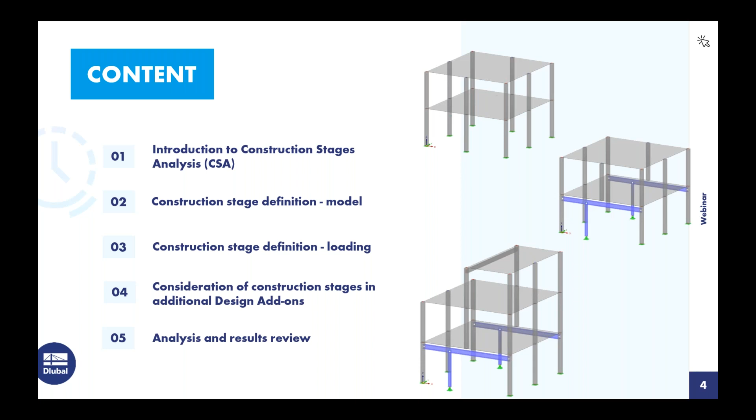So we might be wondering, why would we want to consider stage construction? Well, we know during the construction process that the structure may actually pass through several loading conditions that vary from the completed structure. For example, when we're talking about multi-level story buildings and adding each additional level on top of each other, the previous level is already undergoing deflections and stresses. For example, if we look at the building on the right-hand side, we set up our formwork for the first level, we let the concrete cure, we remove the formwork and we move on to the second level. That first level is already undergoing some of these deflection stresses from self-weight alone, or maybe some of those additional construction loads.

So we'd like to take those into account with stage construction. Regular simple structures may see very little difference when we compare the stage construction to simply applying the loads to the finished structure. However, when we're talking about multi-story buildings or structures with vertical irregularities, such as interrupted columns or walls, we might actually see a significant result difference between the finished structure versus taking into account each continuous stage. The construction stage analysis add-on within RFEM allows us to compare similar structures under different modeling or loading scenarios in a single file, and we also can include nonlinearities with these comparisons. So rather than creating multiple files with the first level completed, then the first level and the second level completed, we can consider all of that in a single model.

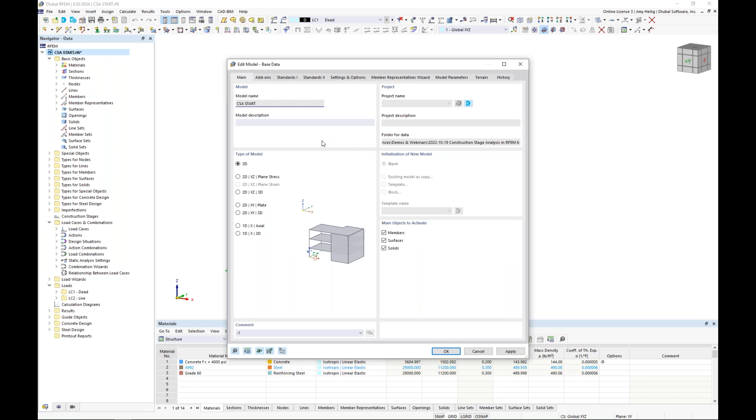Under this second tab, this is where we have all of these optional add-ons. This would allow you to essentially purchase these add-ons specific to your materials and design for your particular projects. For today, we're going to be working with the construction stages analysis add-on. You can see that's turned on here, as well as the concrete and steel design add-ons located over here on the right.

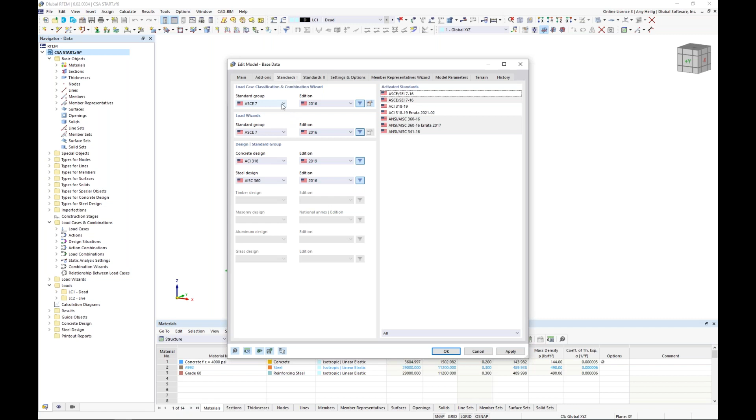Now under the third tab, this is where we set our standards. We want to generate the load combinations according to ASCE 7, available within this dropdown. We'll see here the NBC standard, as well as Eurocode and many other international standards. As far as the concrete design, we will be using ACI 318, and steel design will be AISC 360. Using this dropdown, we can see the CSA standards available, as well as other international standards.

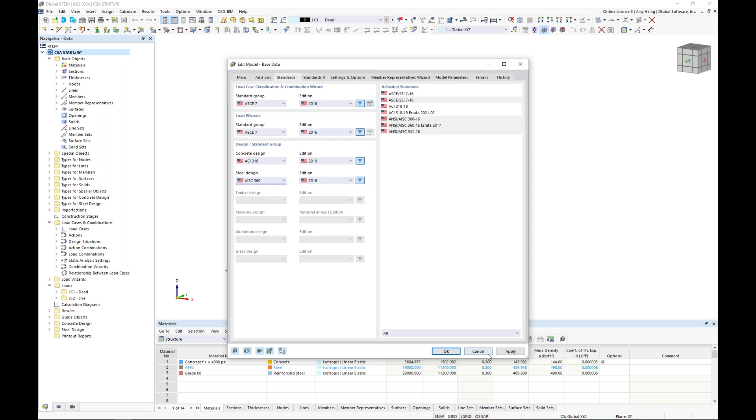So once we have verified this information under the base data, we'll go back here to review some of the elements that have already been modeled. If we take a look again at the navigator, we'll see that all of our elements were utilizing 4,000 PSI concrete.

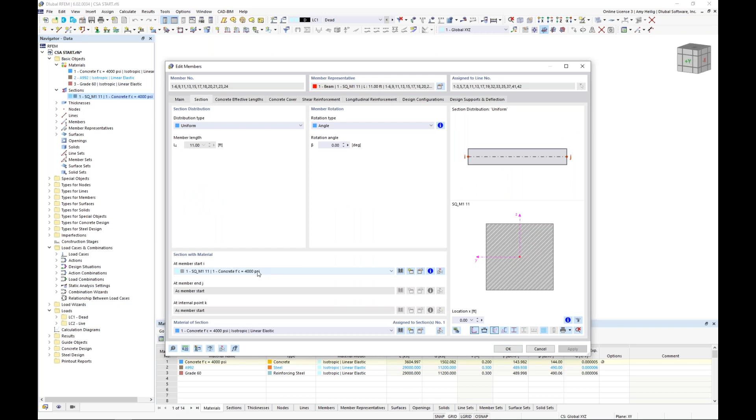Looking at our cross section, so all of my columns here, if I double click on one of them, are going to be utilizing this 11-inch by 11-inch square section. Under the second tab, we can see that the concrete material here is set to 4,000 PSI.

Now back under the main tab, notice that the design properties is checked on here. This simply means that we not only want to use this member for the analysis within the main program RFEM, but we're also going to do the design utilizing that concrete design add-on that we had turned on within our base data. So this gives us all of the available tabs up here to define our reinforcement that will be used later on within the strength and serviceability design.

Now, I'm not going to go into too much detail today. There is an additional webinar devoted entirely to concrete design according to the ACI that's available on our website and YouTube channel. So just to quickly cover this, we'll see here that we can specify the concrete cover.

For the shear reinforcement, I have defined number 3s here at 12 inches on center. And then I also have my longitudinal reinforcement, which is going to be 12 number 6s spaced evenly around our cross section.

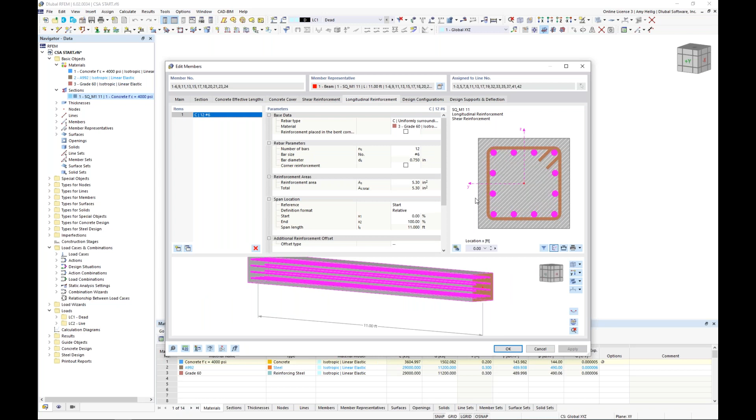So this is a very similar workflow here for my surfaces as well. Each of these surfaces was defined with a thickness of 12 inches. If I double click on one of these surfaces, again we can see that thickness defined here, 12 inches, with the 4,000 PSI concrete.

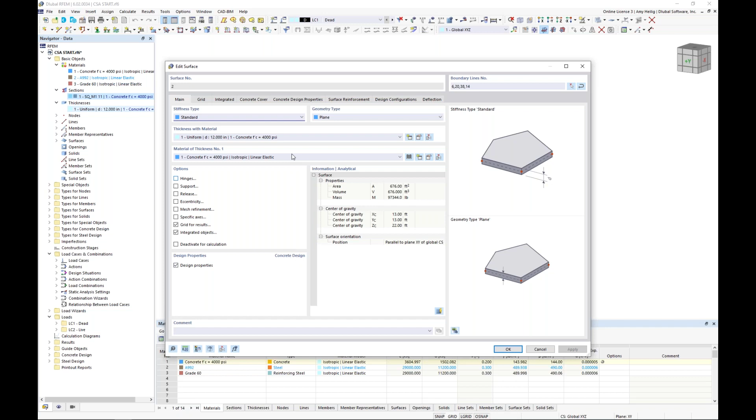Again, I've activated this design property, so we're not only using it for the analysis, but we also want to define our reinforcement for this slab to do the design later on within the concrete design add-on. We see here the concrete cover is defined, as well as the surface reinforcement.

So looking at this surface reinforcement, we can go into the details here. I have specified simply number 6s at 6 inches on center in both directions for both the top and the bottom. So very simple application for this concrete slab.

But I also have all of these additional free rectangular reinforcements defined. This allows me to place some additional reinforcement. You can see number 6s again at 6 inches, where these concrete columns are framing into this slab. So rather than applying to the entire surface, we apply to what we call this free rectangular location.

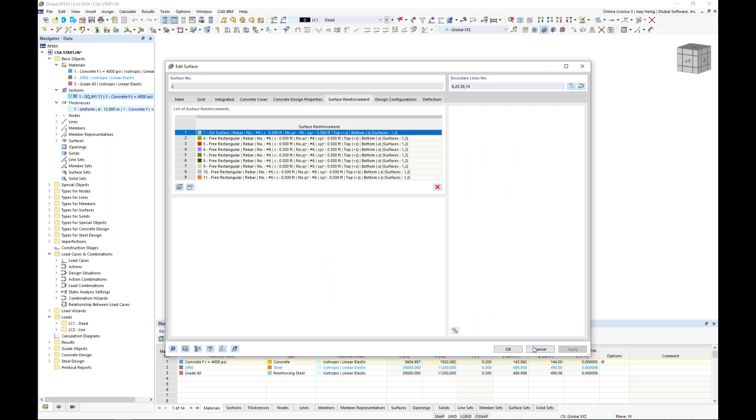So once we have defined all of our reinforcement here, what is actually turned on by default, if we go to our Views tab within our navigator, up here under the Types for Concrete Design, and maybe I turn this into wireframe view, we can actually see the reinforcement here displayed graphically.

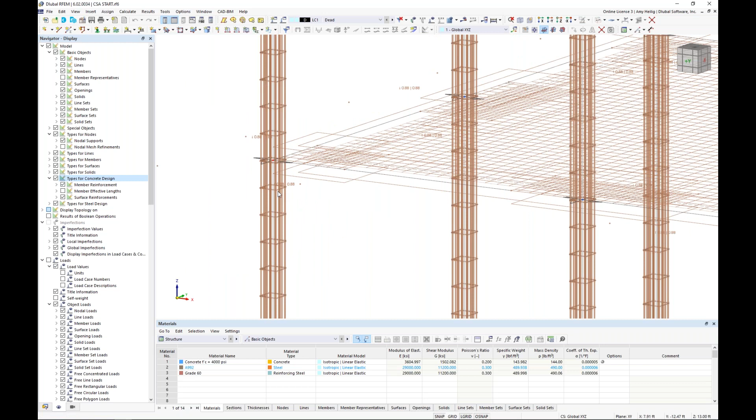So we see our shear and longitudinal reinforcement for our concrete columns. And then, as I mentioned, those slab elements, we have our number 6s at 6 inches on center, but we also have some additional reinforcement here where those columns are framing into the slab. So we can always turn off this display just to get a little bit of a cleaner look here.

Now, additionally, what else I have hidden, which I will turn on now, is the mesh refinements. So I've added these FE mesh refinements, you can see by these symbols here at the tops of each of the columns. So we know that within the program, we're likely going to get what we call singularities, where these single line elements, which are essentially our members here, frame into these slab elements at the single FE mesh point.

So I'd like to refine the FE mesh here, which you can see I have went ahead and done with a nodal mesh refinement.

Additionally, what I have defined, which we'll find under the result objects, is what we call surface result adjustments. Now we can see all of those displayed at the tops of our columns. If I double click on one of these, we have the ability to actually average out the internal forces over a set area. Again, this just helps smooth out those singularity areas.

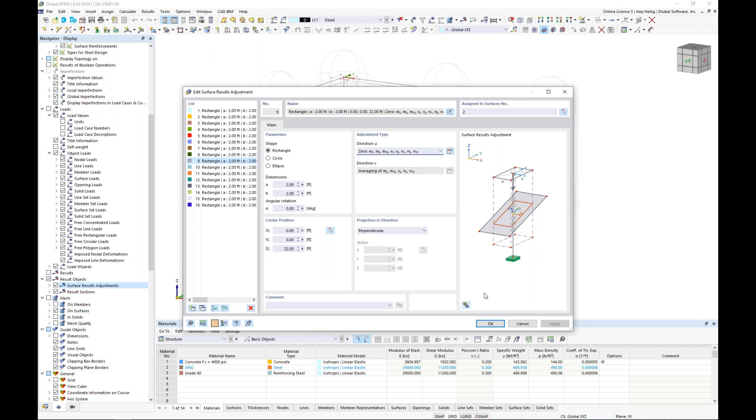For my simple example today, I actually just zeroed out those internal forces at those locations. They're not really a concern for our simple example, so I went ahead and set that as the definition type here for these surface result adjustments. Again, all of this is just to help with those singularity issues.

So we'll go ahead and turn those off. These will come into play a little bit later on, but for now we will turn this back into the rendered view. So this is my starting structure, just a simple two-level concrete structure.

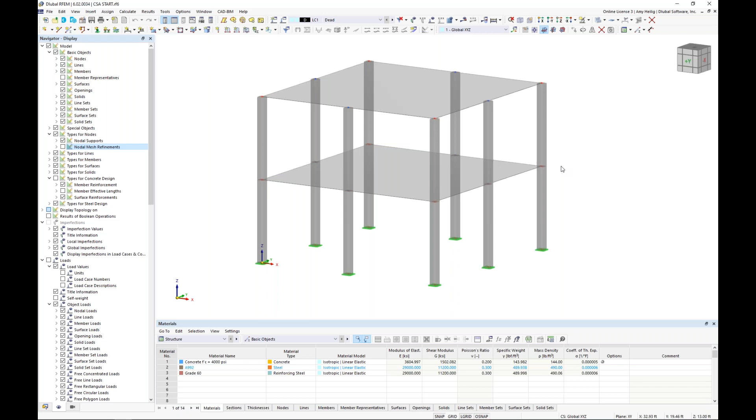Ultimately what I'd like to do is remove these center two columns on the first floor. Instead of these center two columns of the existing structure, I'm going to add in some steel beams that span between these exterior columns underneath the slab, as well as an additional couple of steel columns that are slightly offset from the center of the structure. So we're going to deactivate these columns and instead add in some steel members, which will describe the workflow here of our staged analysis.

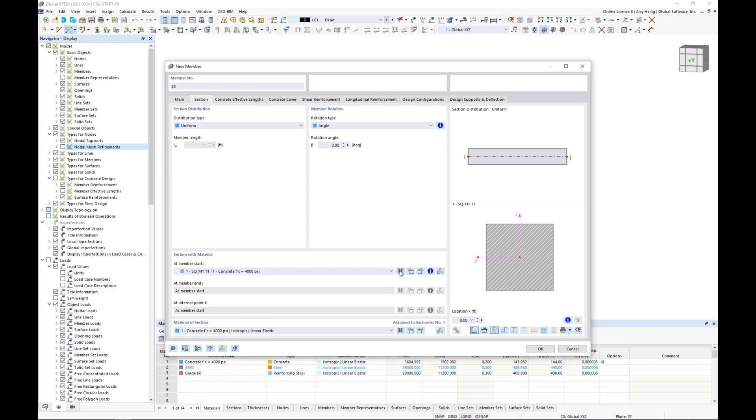Before we define any of these construction stages, we need to ensure that we have everything completely modeled in RFEM. So we will begin by drawing a new member here, and up in my quick toolbar I can draw a new single member. Now under the section tab, I want to define a new cross-section by visiting my cross-section library.

We can see all of the various sections available to us, including the parametric sections, where we simply input the dimensions and the cross-section properties are calculated automatically. Now, alternatively, we can view these standardized sections.

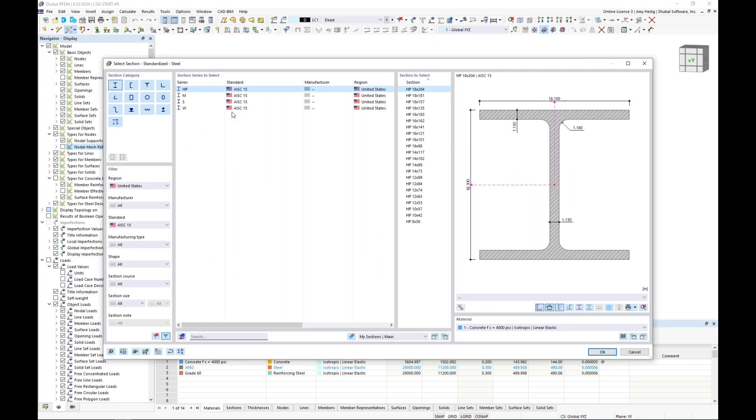For example, we can activate our I-beams. We can use our filters on the left to filter to the United States and to the AISC 15, and I want my beam section to be a W14 by 82. So I scroll down here to my list and select the 14 by 82.

Of course, we don't want this to be a concrete material, so what we'd want to do is activate our material library for this particular section. Once we launch our material library, again we can use our filters on the left to filter to the material type steel, then set the standard to the AISC 360, and we'll see steel A992.

Now for me, I already have this steel material defined within this model. So rather than redefining a new material every time, I can just select it here within my dropdown. I select material number 2, A992, and our beam has now been defined with the correct cross-section as well as the material properties.

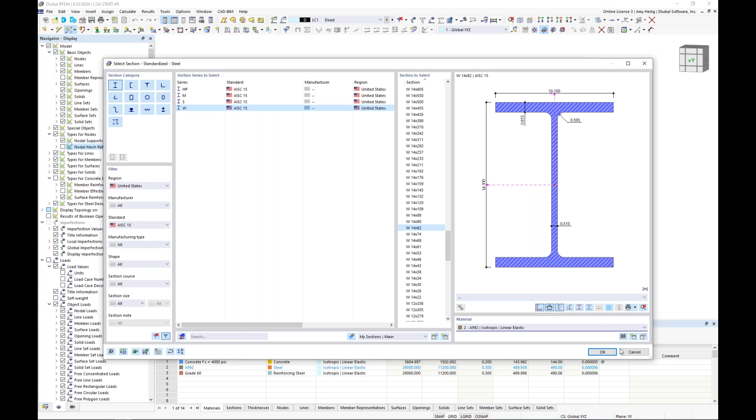In addition to defining the cross-section and material, notice that the design properties is turned on as well, but we're no longer referencing the concrete design add-on we activated under the base data — we're now referencing the steel design add-on. Before I draw these members, I also want to activate a couple other options, including hinges and eccentricities.

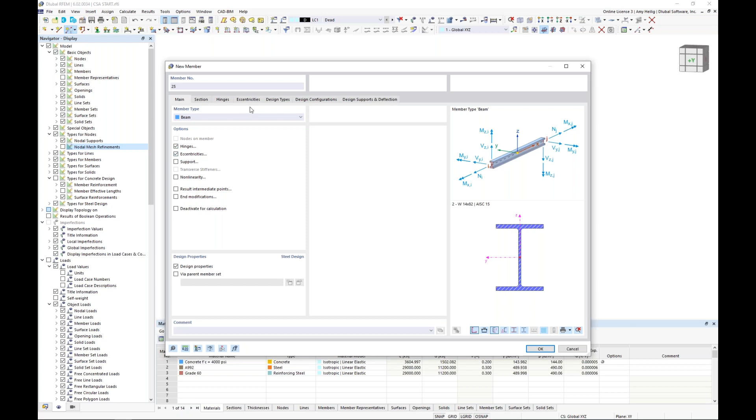Notice we have two additional tabs here at the top. Remember that everything within RFEM is considered fully fixed, so if we want to release a moment, for example at the ends of the member, we need to define a new member hinge. We do so by activating the hinges.

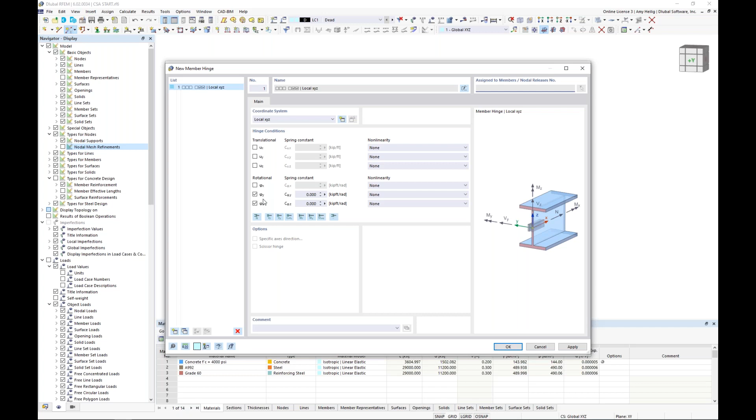We create this new definition type, and the program automatically assumes I'd like to release the moments based on the local Y and local Z axes of the member. So this is a member end moment release. I click OK, and now I've applied that to the member start. Rather than redefining for the member end, I can simply select it from my dropdown. So we'll go ahead and release the moment at either end of this particular section.

Now the eccentricities is a very similar workflow. We want to define a new member eccentricity here, and I'm going to use this option within my dropdown relative to section.

I'll tell the program to take the topmost point of my cross section, and I want to offset it from an additional object that already exists within my model. I'm going to select the option surface, and then I can graphically select surface number 1. I want to drop this beam member down below the bottommost point of this surface.

The advantage of using this option relative to section is that if I make any changes to my cross section size, or any changes to the thickness of my surface, this eccentricity will automatically update. I don't have to come back in here and adjust it manually.

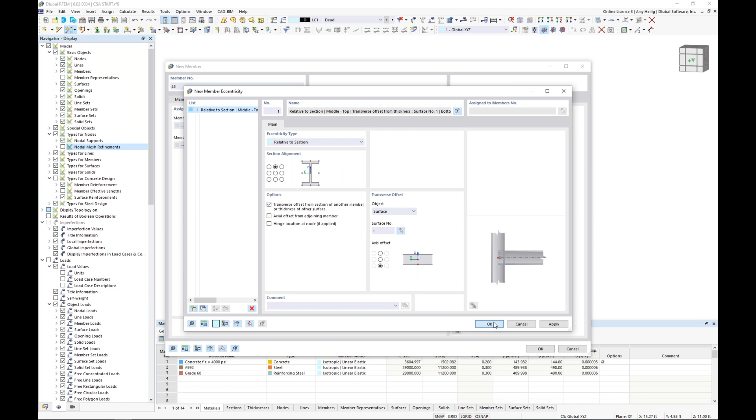So we applied that eccentricity definition to the member start. We also want to apply it to the member end. Now that we have defined the hinges and eccentricities, I click OK, and then I will snap from the right-hand column to the left-hand column at the front of the structure, and also do the same at the back. Now we can see this steel beam drop down below the surface.

Obviously, it's intersecting these concrete columns, but that's completely fine. We'll make these changes later on with the construction stages so that both of these do not exist together.

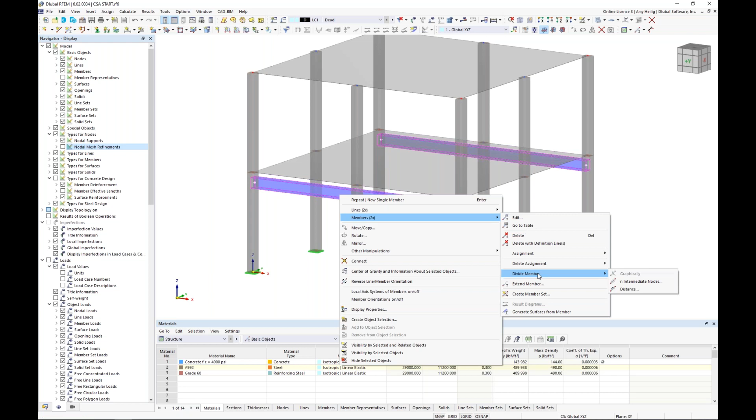I'm going to hold down my control key and select both of these members, right click, and under the member option, divide the member by a set distance. Here I want to add a node along the member 8 feet from the member end. But instead of actually dividing the member, I'll turn on this checkbox to create the node along the length of the member without dividing it.

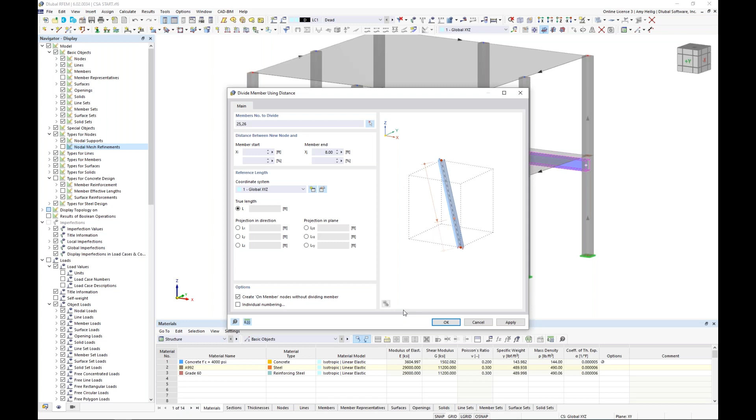When I click OK and we turn this into wireframe view, you'll see that this is still one continuous member, but we now have a couple of nodes defined along the member length. These nodes are special in the sense that they're of the type on member, and the program automatically detects which member it should be integrated with.

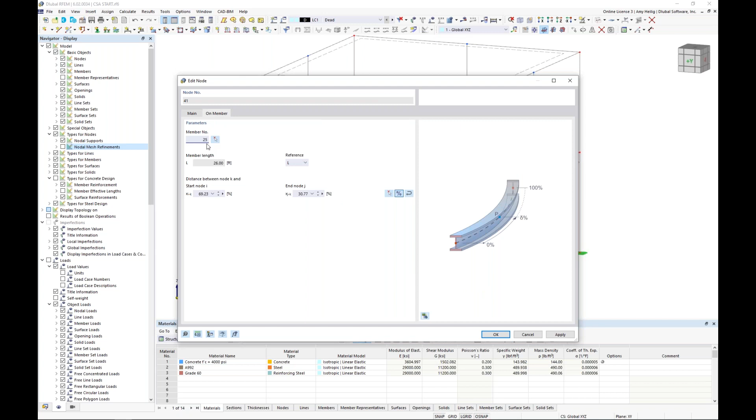So this allows me now to draw in my steel columns that will frame into these steel beams. I'll begin by adjusting my drawing work grid, which we can turn on at the bottom of the page, and we will also adjust the plane.

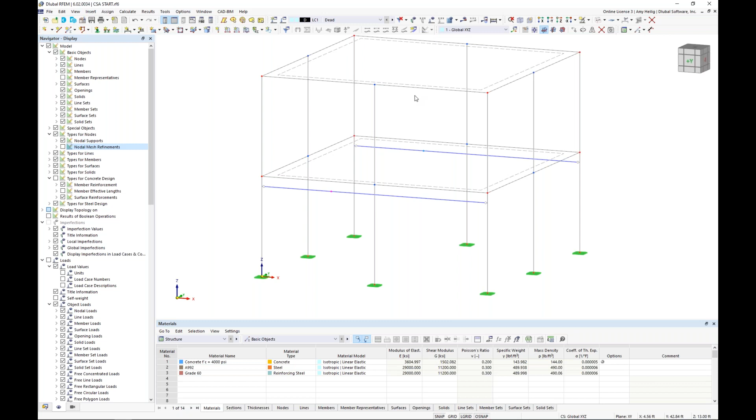I will create a new cross section yet again. The member type is set to beam. The section will be defined once again from my section library. In these standardized sections, I want to select a W8 by 35. Remember, I already have my A992 material defined within the model, so I can select that here.

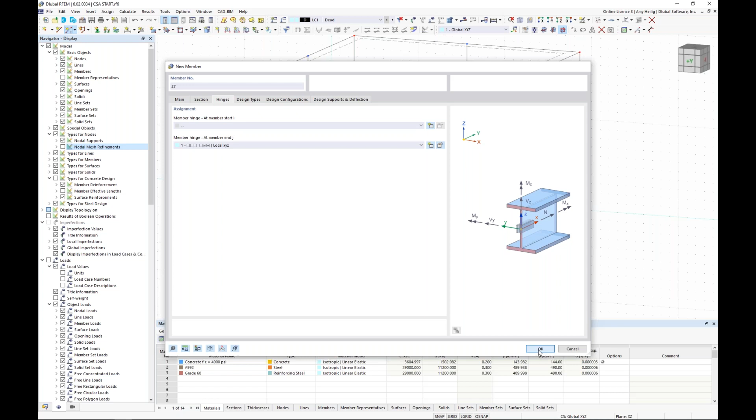I click OK. The one thing we'd like to add here is also a hinge definition. Under my hinges tab, remember I have already defined that moment release, so I can select it from my dropdown, where I can release the moment at the member end. I click OK, and then I'm going to snap from the bottom of the structure up to that node that was created. I can right click to exit this dialog box.

If we take this element, we can highlight it, hold down our control key, and drag and drop it to the rear of the structure to create that additional column.

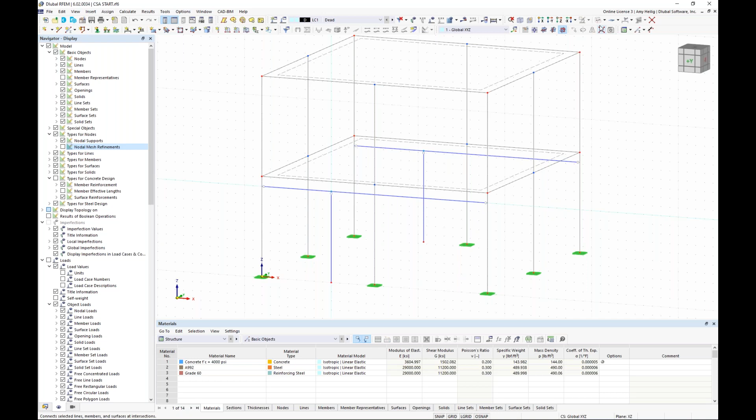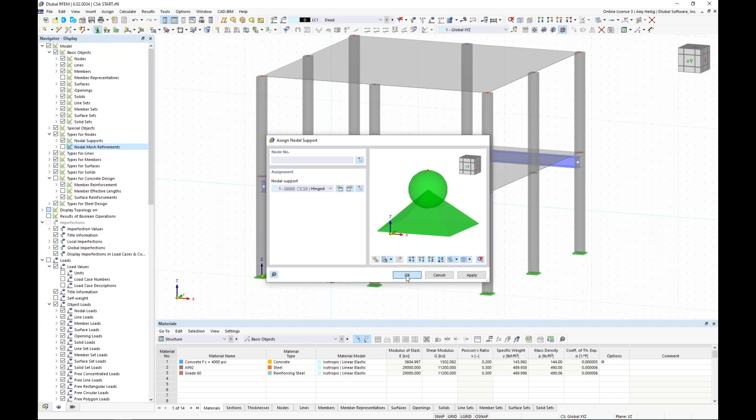Now that these two columns have been generated, there's a few additional things to consider. Number one, we obviously need to add some supports to the bottom. We'll go ahead and add in a new nodal support, using one of the default definition types, hinged. I can click at the bottom of these steel columns to add in that nodal support.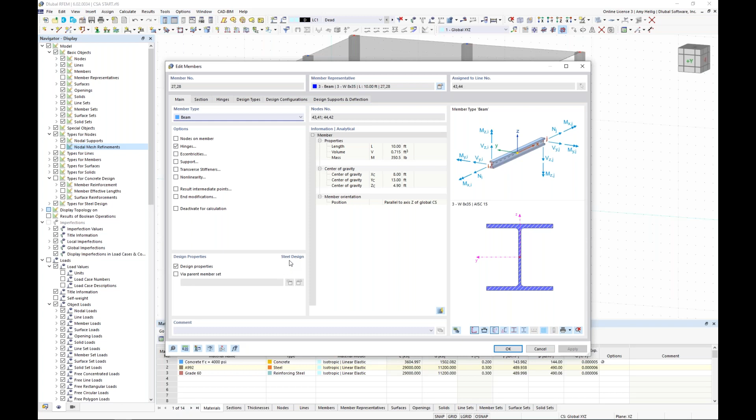The second topic: holding down my control key to select both of these columns. Remember, we are going to design these members utilizing the Steel Design add-on at the end of this example. But one thing required if we want to do so is to define information like the unbraced lengths, which we do under the design types effective lengths. I have an additional webinar devoted entirely to steel design according to the AISC that goes into much more detail on the unbraced lengths or effective lengths definition type.

So we'll quickly add in these intermediate supports applied here for flexural buckling, torsional buckling, and lateral torsional buckling. Under this second tab, the default option is to add in this intermediate support at the member start and member end.

And now my unbraced lengths for my stability design will default to the full member length. So when I click OK, we go back into the model and the unbraced lengths have now been defined here for these particular elements.

Now we need to do the exact same thing here for our beam elements. So we'll select both of these elements, and under the design types, we define a new effective length. But this time, I want the program to detect these intermediate nodes, in particular where this steel column frames up into this steel beam, where I can add an intermediate support in the vertical direction. So now the program will consider this with the effective lengths or unbraced lengths for our stability design.

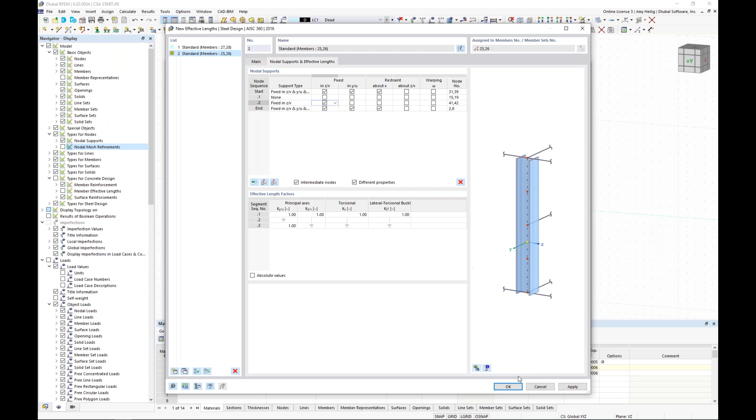Okay, so that takes care of the unbraced lengths, which will again come into play a little bit later on for our actual steel design according to the AISC.

The final topic here related to this first story is that currently this slab element is entirely connected to this steel beam, so full force transmission, full moment transmission between these two elements.

Now, if we would like to release some of those degrees of freedom, what we can do is consider what we call a new line hinge. So under the option here, types for lines, we expand this folder and see a line hinge where we can right click to create a new definition type.

So with this line hinge, I'm actually going to release all degrees of freedom. So we have 3 in translation based on the local X, Y, and Z axes, and 1 in rotation. Keep in mind that these are based on the local axes of the line element itself, not the local axes of the surface or of the member, but of the actual line. Each line has its own X, Y, and Z axes.

But rather than keeping these as fully released, we want to add in a nonlinearity. This nonlinearity will allow the slab to bear down on the beam when we have this downward deflection. So if we have a negative shear value in the local Z direction, we should see full fixity. But if we have uplift, then that relationship between the slab and the beam will be released. So we're applying this nonlinear behavior to the line hinge.

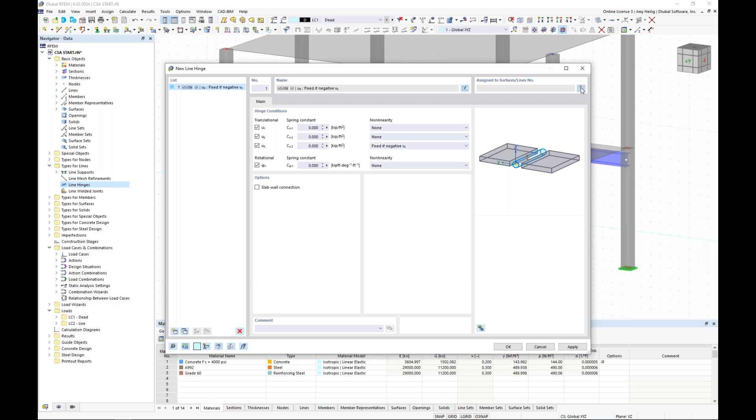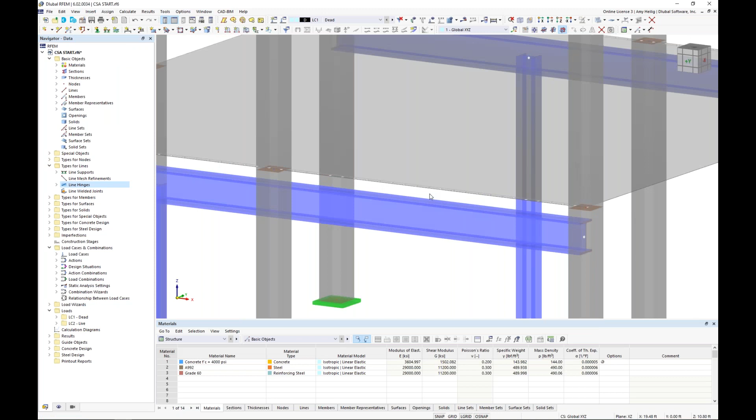So once we have the definition type presented, we want to apply it to the model. We do so by first selecting the surface that we want to apply the line hinge to. Then we select the lines, picking the front line number 12 concurrently with the back line number 18. We click OK, click OK. We can zoom in and we'll see a very small symbol for that line hinge definition.

Again, this will also come into play with our construction stages. So we're now complete with this first story.

The final thing I want to do with this model is to actually add in a third story, a partial third story. Before we do that, if you remember, I'm going to go back to the nodal mesh refinements. I'm going to turn back on my concrete reinforcement and also those surface result adjustments, because when they're graphically displayed, this will ensure that when I copy all of these elements to the third story, all of these details are also copied.

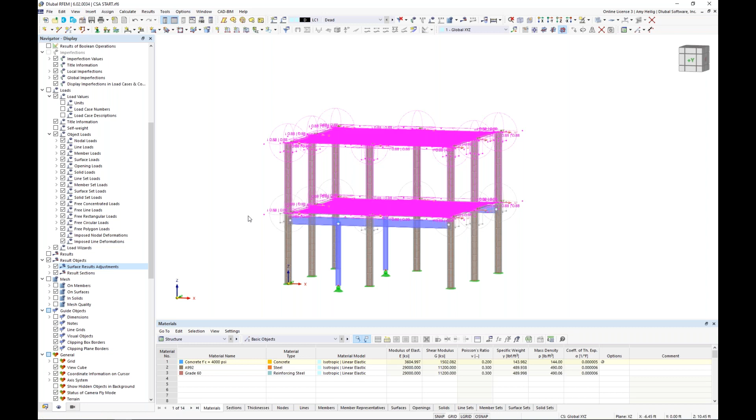So we can go ahead and highlight this top story, including the reinforcements, mesh refinements, and so on. Normally we could use this simple drag and drop copy that I showed you with my steel columns, but I want to take advantage here of the Move Copy tool for a specific reason.

So we're going to create a copy here of that second story, and I can either type in my displacement vector or use this measurement tool. I can snap to the bottom of that second story up to the top, and we see the program automatically detects this is 11 feet in the Z direction. But under the numbering and options, I have the ability to not only copy all of the elements, but also the loading. So I have some existing loading on the structure for dead load and live load, which we'll visit in just a few minutes.

By activating this checkbox, all of those loads will also be copied. So I click OK, and what we should see here is the addition of this third story.

Now for this third story, I actually want it to only be a partial third story. So we'll need to clean this up slightly, and I can do so by holding down my control key to select the top nodes of these columns. I hit delete on my keyboard, and now all of those columns are gone. I'm also going to hold down my control key to select my columns as well as the nodal point at the tops of the columns.

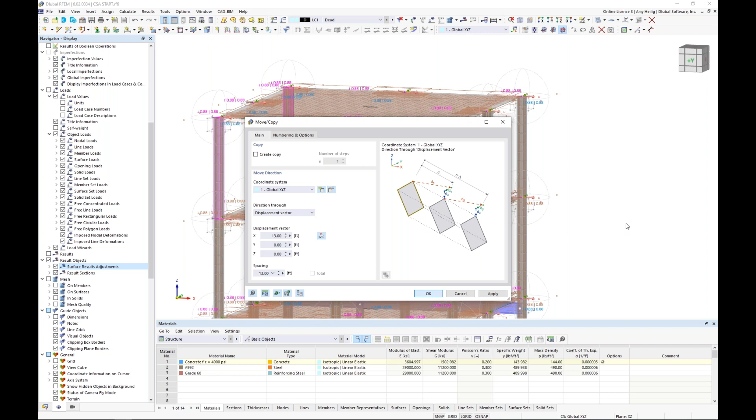I'm going to use my Move Copy tool again, but instead of creating a copy, we'll uncheck this. I want to use my displacement vector. I will select from the left-hand side of the structure because I want to move those columns to the center of the structure, so a displacement vector of 13 feet. When I click OK, we should see that partial third story.

Notice that all of my reinforcement was copied as well, and it's somewhat adjusted as I essentially shrunk down this third story to a partial third story. Back under my navigator, we can see the types for concrete design and all of my surface reinforcement listed. The program was intelligent enough to apply the same reinforcement to that third story. We see our number 6 is at 6 inches on center, and our free rectangular reinforcement defined for that third story.

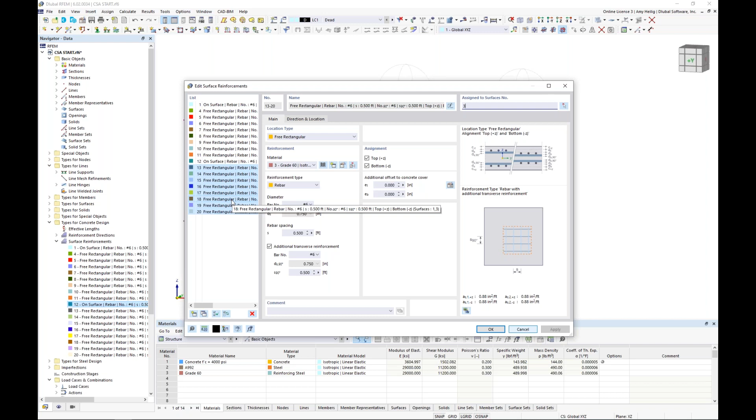We can make modifications here if we don't need such close spacing, or want to change our bar diameter, we can do so. But for this example, I'll leave everything as we see here. So all of this information that exists, we can simply highlight it and hit delete on our keyboard.

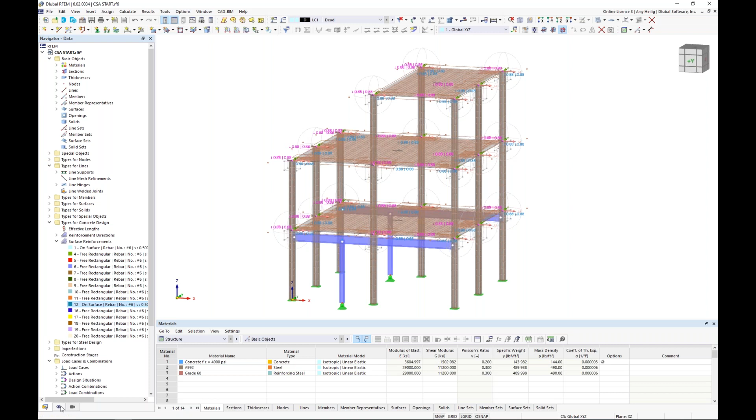So essentially the modeling is now complete for this structure. Again, before we define those construction stages, we need to ensure that everything is fully modeled within RFEM itself. I want to turn off the nodal mesh refinements, my reinforcement, and those surface result adjustments just for a cleaner look. Now we're finally ready to begin with our construction stage definition.

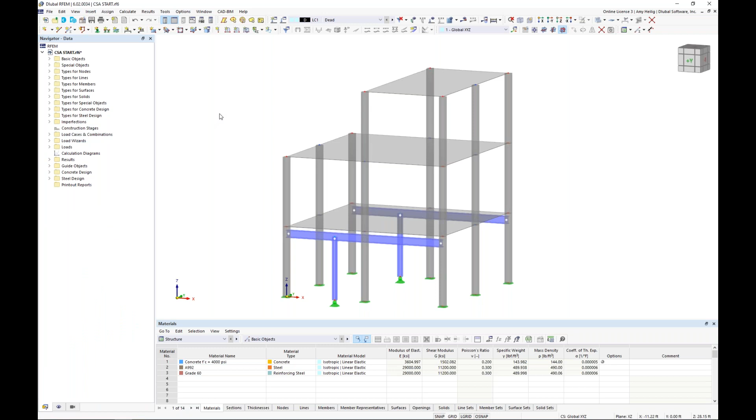Back in my navigator, we have a nice feature here: if I right click, I can collapse all of these folders. Actually, there's one more thing I forgot before we define our construction stages - maybe we wanted to apply a quick rib element that spans between these columns. Just to introduce you to this rib type, we can draw in a new single member.

We can see here the member type would be set to rib. What's special about a rib is we can integrate it with the slab, so those internal forces will now include the internal forces from the slab for some effective width that we define. We also can turn on the design properties to design this as a T-beam, including the reinforcement in the concrete design add-on. For today, I'm not interested in designing it, so I can simply turn this off. I only want to consider it for the analysis. Notice all my tabs to define my reinforcement are now gone.

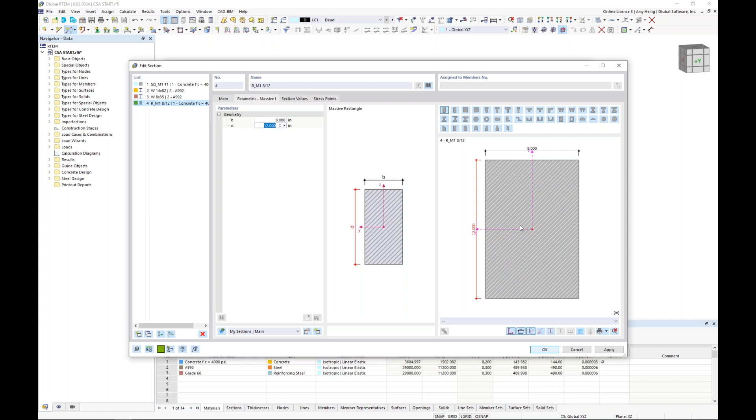Under the section, we will create a new cross-section type for the last time, and we'll choose this massive rectangular section, where under the second tab I can quickly choose my dimensions - I'll type in 8 by 12 inches for this rib element. 4,000 PSI concrete is already defined, and under this second tab, we want to drop this down below the negative Z direction of the surface element itself. When we click OK, we can draw in this rib element from right to left. Again, internally we are including the effective width of this element. If we revisit the rib section, we can see that drawn graphically.

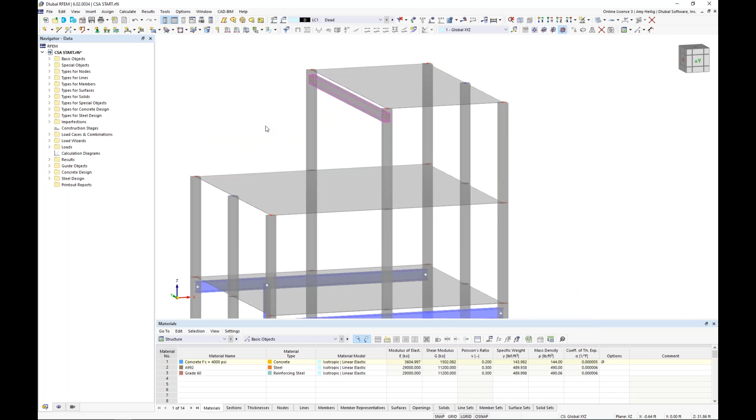Okay, so now we are done with all of the modeling within the RFEM program. We can move on to the construction stages. We've collapsed all of these folders just to make this a little more visible. You'll see here the construction stages option - this is only available because we activated that construction stages analysis add-on under our base data.

So we will start here by right-clicking to create a new construction stage. The program defaults to construction stage number 1 and gives it the name 'start'. We can override that name if we'd like, but we need to tell the program which elements are active for this first stage. We'll begin with our members, our surfaces, as well as our nodal supports, and we get additional tabs up here.

I did want to point out you'll notice this option over here that's grayed out for the time-dependent analysis. This is still in development. Eventually we will link the construction stages analysis to our additional add-on for time-dependent analysis to take into consideration topics like creep and shrinkage, but for now this is still in development.

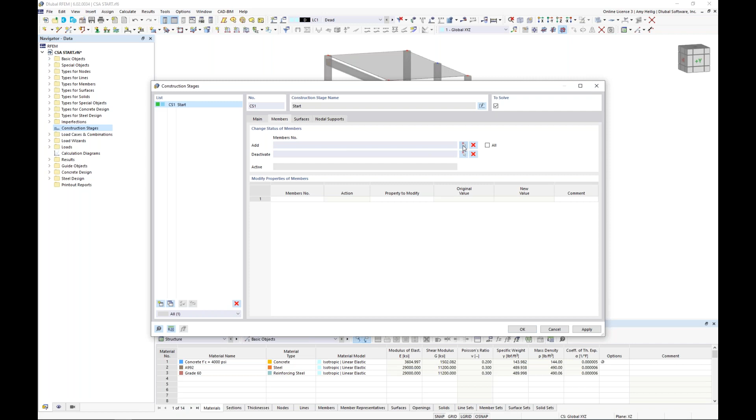So under these additional tabs, what we would like to do is add in the initial elements for that first stage, and we begin with our concrete columns. Down here at this first level, I'm going to select all of my concrete columns, and notice I'm making sure I'm not selecting any of these steel elements yet. For my second floor, I select all of my concrete columns here as well.

I click OK. For my surfaces, I want to activate surface number 1 and surface number 2, and I click OK. Finally, for my nodal supports, I want to activate the nodal supports at the base of these concrete columns. Again, I am not selecting the nodal supports of my steel elements, and I click OK. So my first stage definition is complete.

I'd like to create my second stage definition here, and I can do so within the lower left corner, number 2. Then you can see here that I again have the ability to override the name. So if I'd like to rename this one, we can call this one Add Steel Members.

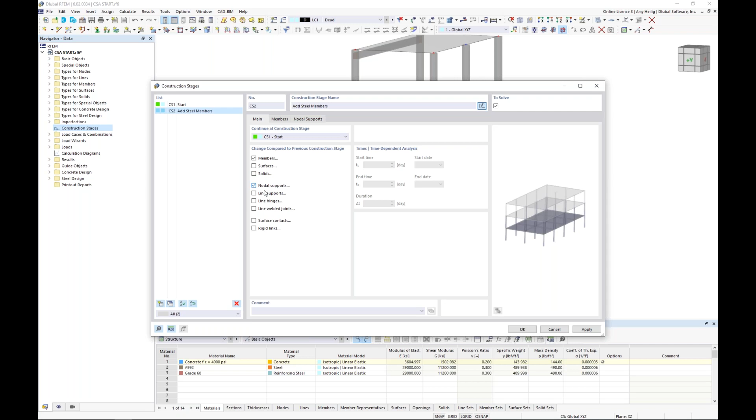I want to activate here my members. I'm actually not making any changes to my surfaces, so we can leave this active, but for simplicity we can also turn it off since we're making no changes. We can go ahead and select the nodal supports. Remember, we also added in those nonlinear line hinges, so we want to activate this here as well.

Now under the members, this is where we want to deactivate those center concrete columns. So I select here graphically members number 9 and 13. Now at the same time, I'm going to activate all of my steel members, so I can graphically select all 4 of these steel members. This entire process is going to be completed here within this second construction stage.

Now, by all means, we could have certainly separated out these options into two stages. Perhaps we'd like to deactivate our concrete columns first in one stage and then an additional stage to add in the steel beams. It all just depends on how your construction stage workflow is for your particular project. But for me, I just define these all in one stage, so that will happen simultaneously.

Now the nodal supports, we do need to add in the pin nodal supports at the base of the steel columns, so we go ahead and select those. I don't need to worry about deactivating the supports at the bottom of the concrete columns, and in fact the program won't even let me because it says these members no longer exist. So those supports are no longer active either.

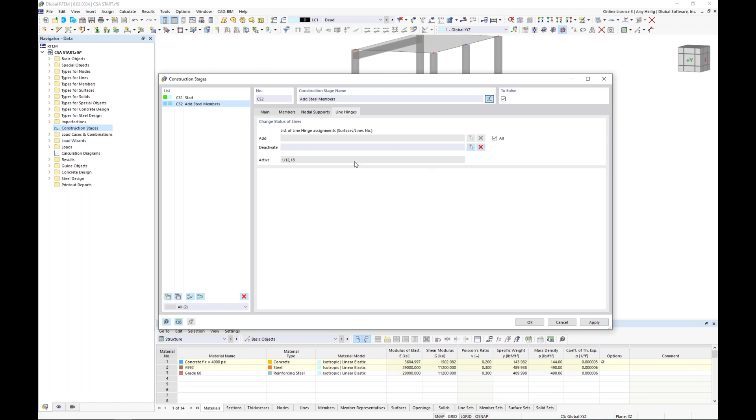Now, finally, we also have the line hinges. So I can graphically select the line hinges, or alternatively I can just simply hit this all checkbox. We only have one line hinge definition in the entire model, so this option all will go ahead and activate all line hinges here. This will complete our second construction stage.

Now the final stage, which we again go down here to the lower left corner, and we want to rename this one to Add Third Story. The options here to activate, we want to leave on the members. We also want to activate the surfaces, but everything else can be unchecked.

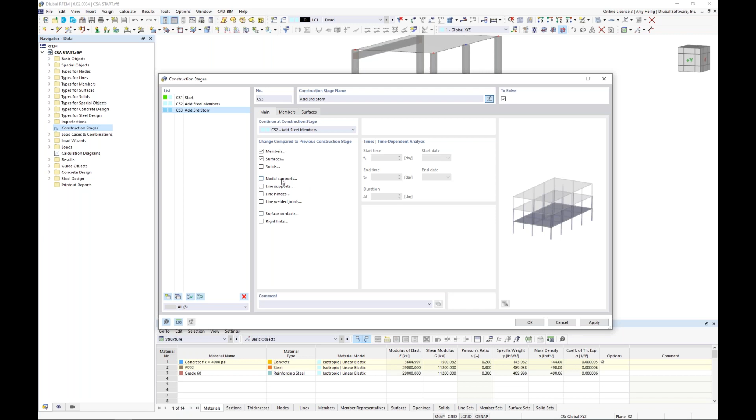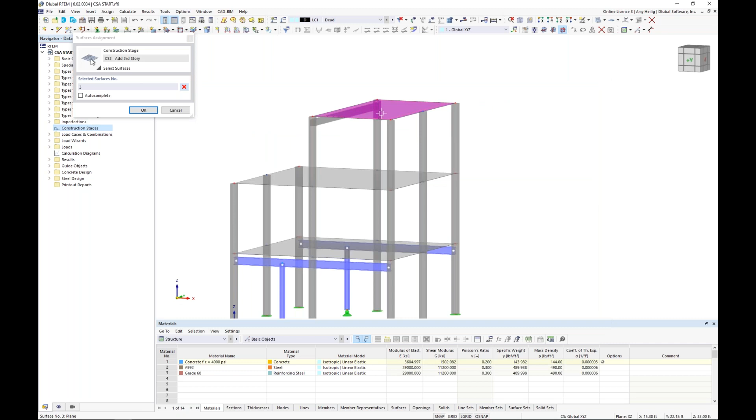For our members, we want to, of course, add in all of our concrete columns and even that rib element at that third story. I click OK, and then for my surfaces, I could either type in directly surface number 3, or I can graphically select it here. This will sum up my construction stage definitions.

So once I am done defining all 3 of these stages, I can click OK. And what you'll actually see here at our dropdown is each of these construction stages presented to us where we can graphically see what's going on.

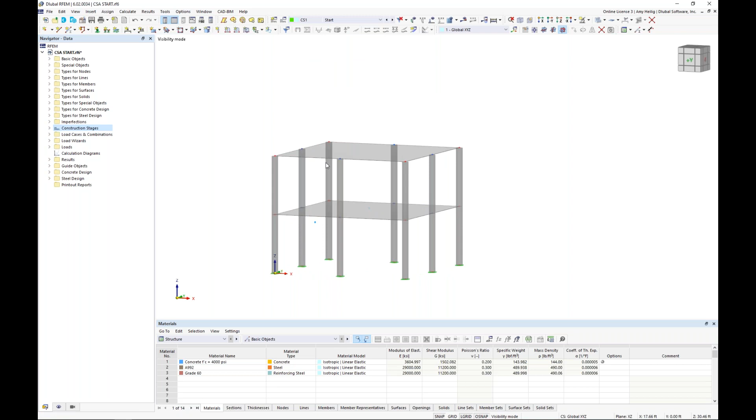So here's stage number 1. Here is stage number 2 - notice those 2 concrete columns are gone, and we've added in our steel elements. And finally, we have the addition of the third story. So this will sum up the construction stage definition from the modeling point of view.

But now we need to move on to the loading. How can we integrate the load cases as well as combinations to these various construction stages?

I want to point out first that I have already applied 2 very simple load cases to our model today. If I activate here my dead load and turn on the display of these loads, just simple surface loads applied to all 3 levels. Remember, when we copied this third level, the loads were also copied.

Same concept for our live loads, slightly different magnitude here of 40 pounds per square foot applied at each level. Now, of course, for a project in real life, we'd probably want to add in wind loads, snow loads, whatever else it may be. But for this simple example, we only have these dead and live loads.

So I'm going to access my load cases and combinations dialog box, and we see these 2 load cases listed. Dead load, where self-weight is automatically turned on with the action category set to dead load directly from the ASCE 7. The second load case is live load, again with the action category set to live.

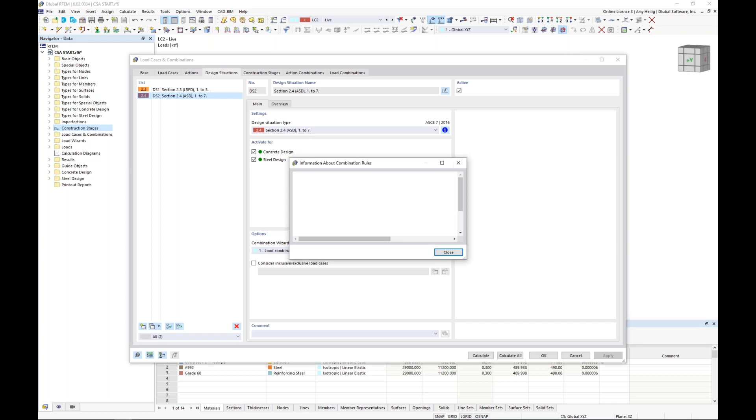The design situations essentially encompass all of our load combinations. So we have two of them here. We have our LRFD design situation from the ASCE 7 - this is going to be all of our factored load combinations, directly from the standard. And we have a second design situation for ASD, our unfactored load combinations. Again, we can just reference here to see exactly what they look like according to the standard.

Now, if we take a look at the load combinations tab, here are my individual load combinations strictly for those dead and live loads, since I don't have any additional load cases defined. I have two factored load combinations that belong to that LRFD design situation shown here in orange, and two unfactored load combinations that belong to my ASD design situation.

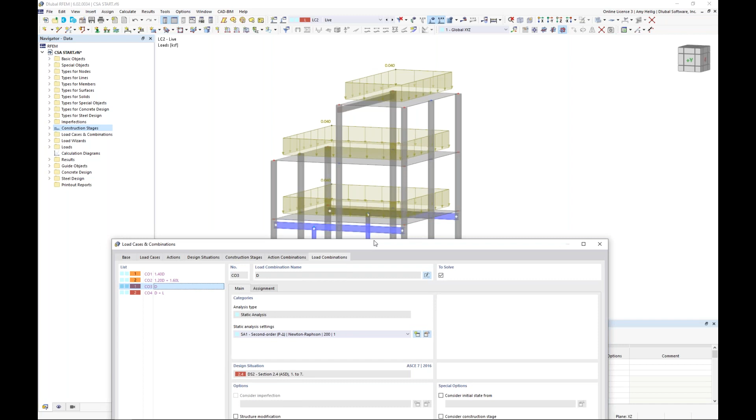Now, if I was applying the conventional method here of applying all of these dead loads and live loads to my structure, on the finished structure with the third story and the steel members, then we would just go ahead and move on with the calculation utilizing these load combinations. But currently, they are not referencing those various construction stages.

So what we want to do here is to go to the Construction Stages tab. Here we see our 3 stages that we have already defined, which are automatically brought into this dialog box. Notice that each one of these stages will reference the previous stage - it says continue at construction stage number 1 for number 2, and then our third stage is referencing number 2.

A couple other options to point out here: the construction stage analysis is done according to the load combinations. This is grayed out because this is also in development - in the future we plan to add in the option for load cases and a result combination using linear superposition. This would be for linear structures where we don't necessarily have to incorporate the construction stages into each load combination, but rather we superimpose the results on the finished structure utilizing a result combination instead.

So this could be a really powerful increased performance for multi-level story structures. Maybe we have hundreds of load combinations, so this will essentially be very efficient. But for now, it's still in development, so that's why this option is grayed out.

Now, the static analysis setting, this is really important. You can see here that my construction stages right now are set to second order. If I go into the detail settings here, we could change this to first order, second order, or third order. We want to ensure that the static analysis settings are either equal to or higher than what we're using in our load combinations and our design situation.

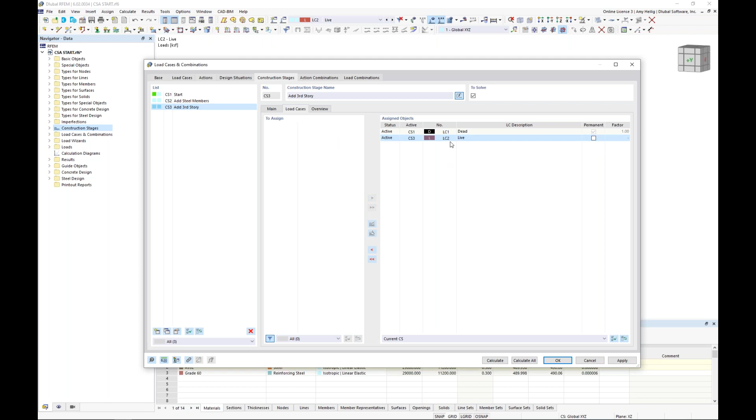And finally, we have our third construction stage where we've added in that third story, and dead load is already automatically included. It has to be because of that permanent checkbox here, but I'm going to factor back in my live load here. So now we have allocated each one of these load cases to the construction stage.

The final thing to do here is to tell the program to create the combinations utilizing the construction stages as well as the combination wizard. So I turn on this checkbox here and go into the detail settings, and I tell the program: don't consider the normal load combinations that we previously saw, rather just consider the construction stages only. I'm not concerned with the final structure and applying those loads with the conventional method.

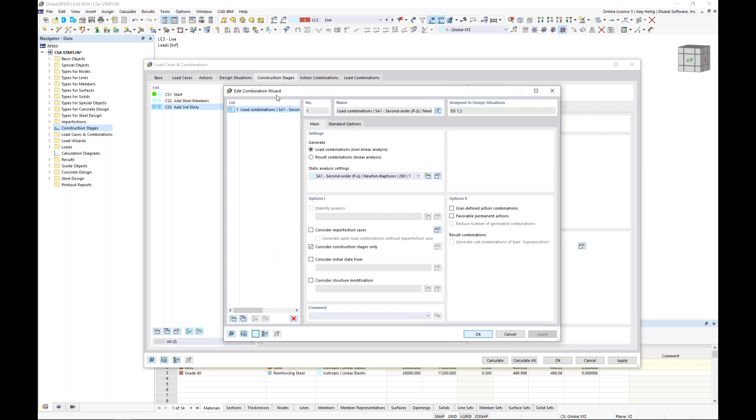And I click OK. Then we can just simply turn on this checkbox here for the rest of these stages. This checkbox is already turned on if we go into the detail settings, because it's part of this combination wizard definition type number 1 here.

So now that we have selected this checkbox, we should see slightly different load combinations shown under this last tab, and sure enough, we do. Notice that we have our factored load combinations, part of that first design situation, but they are now considering the construction stages.

So for stage number 1, we have 1.4 dead load. For combination number 2, still construction stage number 1, we are now also considering the live load, so dead load plus the live load. If I look at construction stage number 2, I'm only considering the dead load, so 1.4 dead. Remember, I did not incorporate the live load into this particular stage.

Notice that over here on the right-hand side, the program says for the initial state, I'm going to consider the previous construction stage. You can see our load combination number 1, so it will take into consideration those strains, those stresses that the structure is already undergoing from construction stage 1, and apply this to construction stage 2 for this particular load combination. Same exact concept here for construction stage number 3.

We can see the initial state is set here, but we're also factoring back in our live load, so we see 2 additional load combinations here. Same exact concept for my unfactored load combinations that are a part of this second design situation here, my ASD design situation. Now we see a couple of grayed out load cases down here at the bottom, and we might be wondering what are those for?

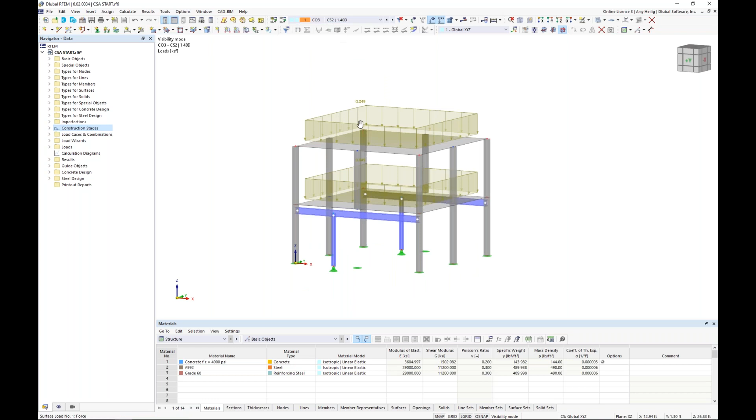Here's load combination number 1 with my dead load. Here's dead plus live. Here's my second construction stage, again only with the dead load. And then I move on to the addition of that third story with the dead load consideration and then dead plus live.

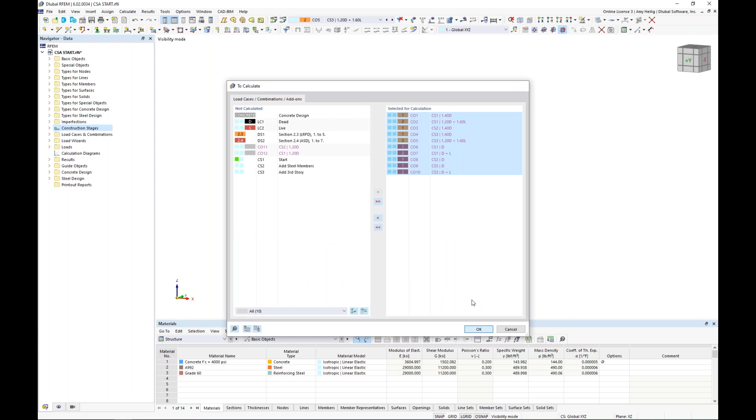So again, the program's automatically combining all of these together. Under calculate, we go to the option to calculate, and I am going to select here only my valid load combinations to move over to the right-hand side. And when I click OK, the program is going to generate the FE mesh, and then new within RFEM 6 is this multi-core processor where we can solve load combinations simultaneously for a little bit quicker analysis here.

So once the program is done solving for all of these load combinations, we're now presented with the static analysis results. So no design yet, just purely the analysis portion within RFEM itself. And we can see our results available to us in our navigator over here.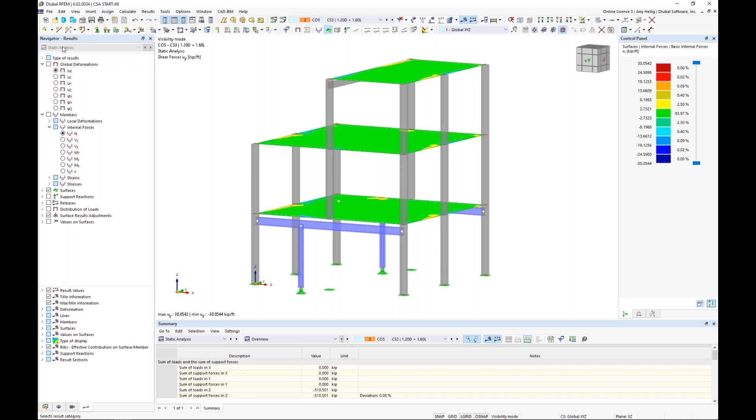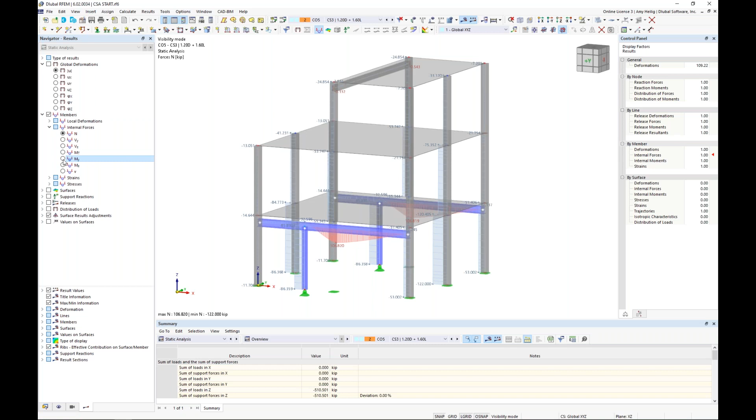For example, we're looking at load combination number 5, and we can view the global deformations of the structure. We also can take a look at the member internal forces, for example, the axial forces. Maybe we want to take a look at the bending moments here for our beam elements. So all of this is visible based on the various load combinations that have factored in these stages.

And of course, we also have our surface results where we can view the bending forces, MX, MY. We can view shear forces. This is obviously for my initial structure, stage number 1.

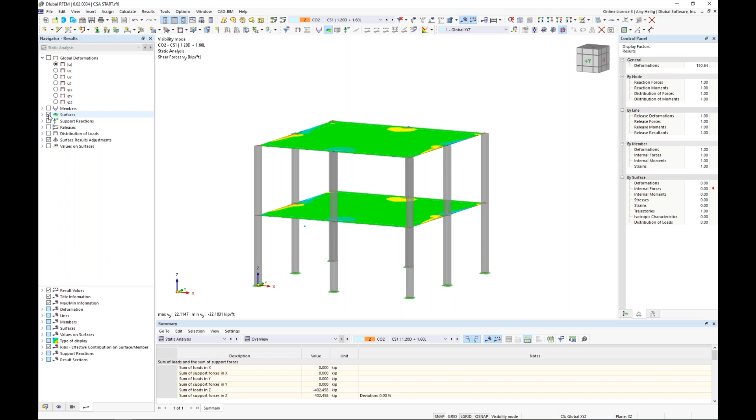So that is essentially the analysis with these construction stages, but I would like to show you how to incorporate also the design with these stages as well. So we can activate the design add-ons by selecting it within my drop-down box here down in the table.

And we see here concrete design, and this is available because we activated the concrete design add-on within the base data at the beginning of the example. And you remember I stressed how important those design situations are because they are absolutely needed here when we move on to the design portion of our model.

So we have here our first LRFD design situation. We're going to select here from our drop-down to relate this to the strength design for the ACI standard. Then I have my unfactored load combinations where I'm going to relate this to the serviceability design.

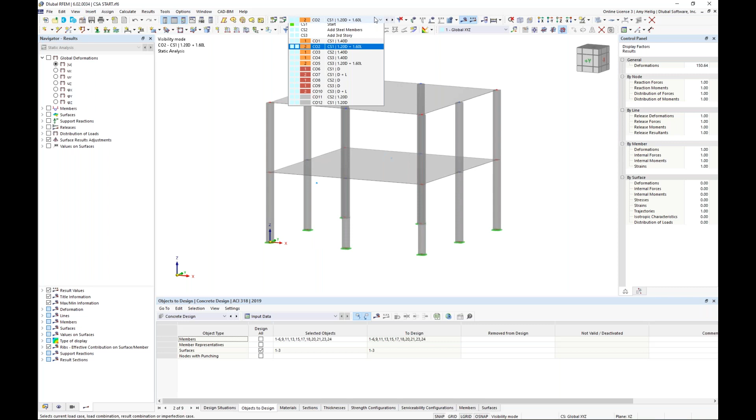Under my second tab, I would select all of the objects that I would like to design, and I can select all of my concrete members, except for, remember, I'm not going to design this rib element here, and maybe I want to design all 3 surfaces. So that's what's currently selected here. So I'm really ready to run my design as well, and I can choose this option here, show results.

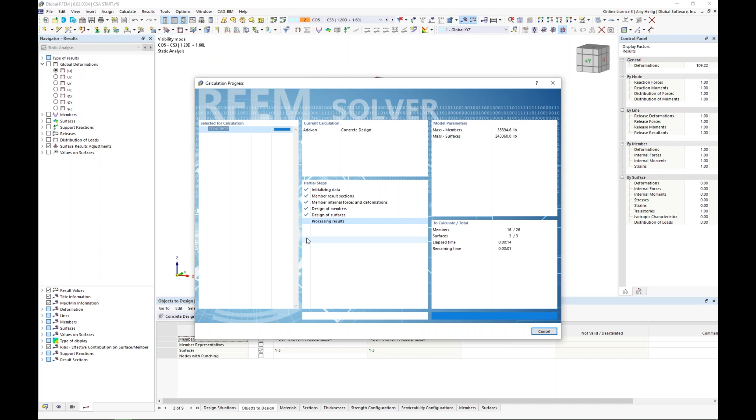Now, I already have my internal forces from all of the load combinations. They're simply brought into this add-on, and the equations from the ACI are applied. We consider the reinforcement to ultimately get our design ratio and required reinforcement for each one of these surfaces as well as our members.

So once we are done with the calculation, we can view the design ratios on the surface, currently in table format. Notice at the bottom we can view the design ratios by construction stage. Here's construction stage number 1.

Now we can view each one of these checks for construction stage number 1. Notice we have a pretty high check here for our shear design, so we probably would want to address the shear design for this particular slab right around where this column element is framing in, but everything else for the most part looks okay.

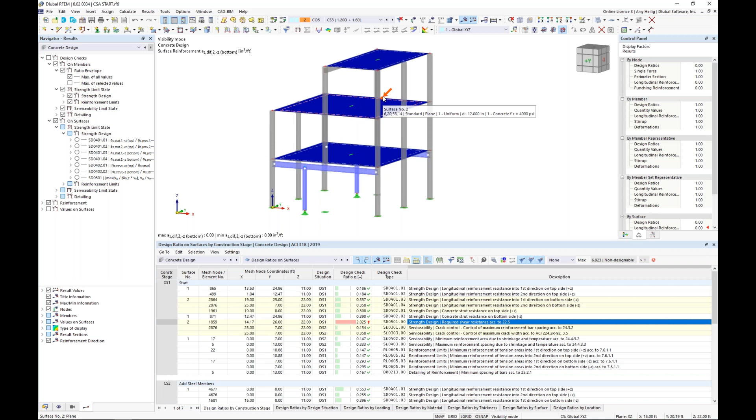We can also view the design ratios by the surface itself. You can see one of the columns here, which shows which construction stage this is applicable for, as well as the load combination. As we select any one of these options in table format, what's new within RFEM 6 is viewing the design check details.

The design check details give us all of our variables in table format, and you can see on the right-hand side all of our equations. This one is rather complex, but if we scroll down to the bottom, we're going to show you how this design ratio is calculated step by step.

We're going to give you the code references in the right-hand column. We also have additional code references in table format. So again, trying to be as transparent as possible about where all of these calculations and code checks are coming from.

Notice here we have our drop down where if we're looking at this particular location, mesh node number 2154, we can select any one of the other construction stages, and the program will automatically update our calculations to show for that particular construction stage.

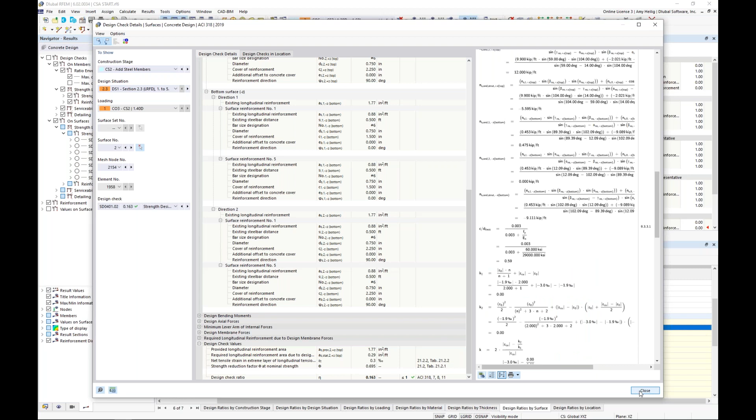Same concept here for our design ratios on our members. We can see design ratios by the construction stage. As we scroll through each one, we're going to see all of the checks relevant to the ACI.

We can also view, similar to the surfaces, the design check details. This one's a little more simplistic for our member design, but the code equations are given, code references, and also new within RFEM 6, we have added the interaction diagrams for these concrete columns.

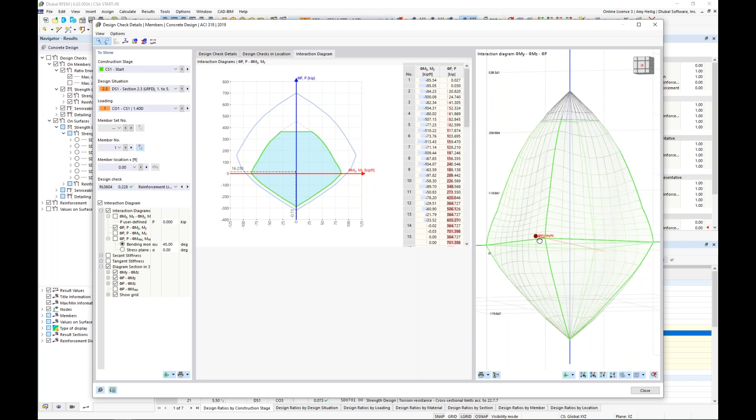So now we see the 3D interaction diagram here. We can see exactly where we fall for this particular member.

Now we can export this information to Microsoft Excel. So table format is nice, but we can also view all of this information graphically over here on the left.

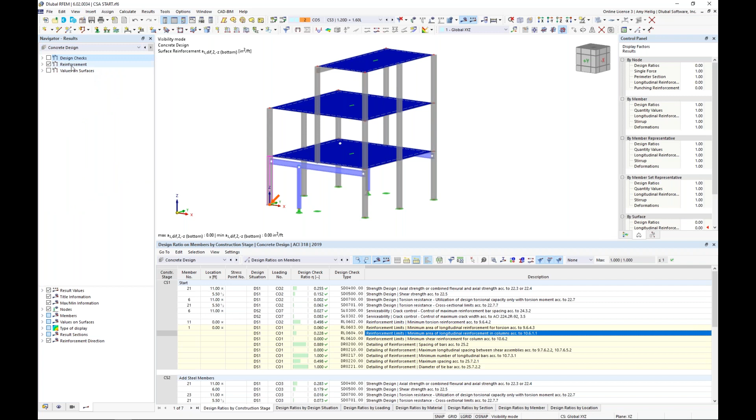So we see now we're no longer looking at the static analysis, but the concrete design. If we right click here to collapse these folders, we can turn on the design check of our members. We can take a look at the strength limit states and the various checks shown here to graphically compare this to our color panel, to see exactly what's happening for these members graphically as well.

So that will sum up just a quick introduction to incorporating the construction stages for the concrete design add-on, but to briefly touch on the steel design as well.

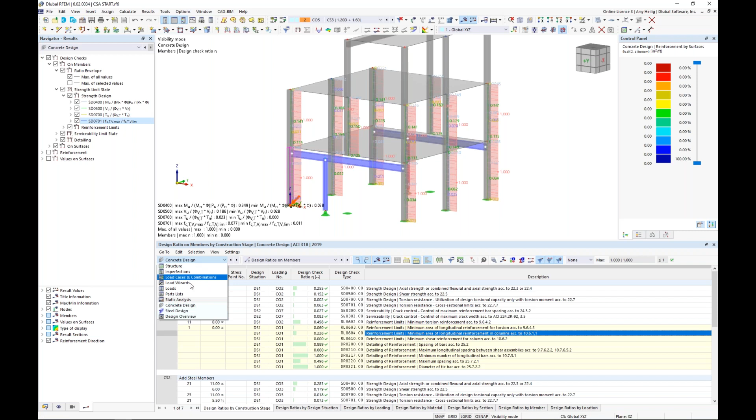Very similar workflow. You'll notice under the steel design, we once again have our two design situations, LRFD and ASD, and we will relate this to the strength limit state for our factored load combinations and serviceability limit state for our deflection checks under the ASD design situation.

Under the objects to design, this is where I could graphically select all four of these steel members. I click OK, and I can run the quick calculation here.

Again, I already have the internal forces. It just brings them into the steel design and applies the AISC equations to ultimately get the design ratios.

So we can view the design ratios by the construction stage itself, and we see construction stage 1. We shouldn't have much available there because those steel members didn't exist yet, but for construction stage 2 and 3, we see all of the relevant checks shown here.

Now you can also utilize the filter options, and if I don't want to see every single chapter for each of these members or construction stages, we can just filter to the max option. So now we see what's actually controlling for each construction stage.

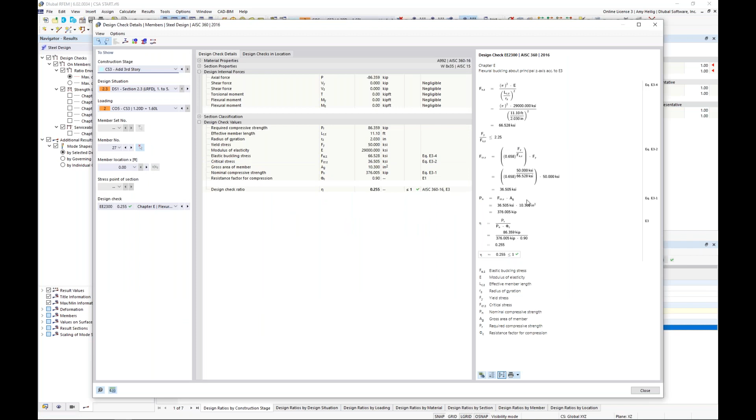And very similar to concrete design, we can visit our design check details, and we see here the code equations, the code references directly from the AISC 360, along with all of our information presented to us in table format.

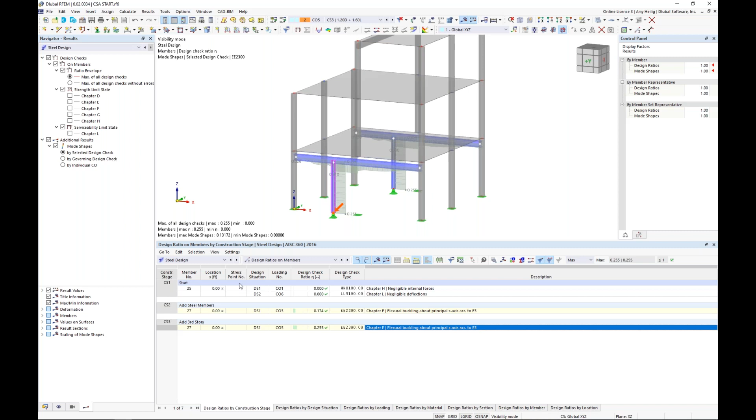So this will sum up the example today where we modeled the entire structure. We created construction stages not only for the model, where we deactivated and activated elements, but also the loading considerations, factoring in the construction stages for our load combinations and design situations. Finally, we saw how to incorporate those stages into the additional design add-ons. This isn't just specific to concrete and steel design, but could be incorporated into form finding, aluminum design, timber design, and so on.

So we'll go ahead and revisit the PowerPoint. I did want to touch on a few future developments that we can expect with our construction stages analysis.

We recently added in RFEM 6 what we already had in RFEM 5 - it just took a little while to get them into the new version. We now have line, surface, and nodal releases, and these will eventually be added to the construction stages analysis consideration. Remember, all those options to turn on or off for activation or deactivation will add in these elements as well.

I had already mentioned stage analysis via load cases and results combinations utilizing linear superposition. This will be extremely helpful for large models with many load combinations, rather than having to factor in construction stages for each load combination. We can superimpose the results on the final structure to consider the stages, which will really help improve performance.

We also will be adding what we call phased massive cross sections and surface thicknesses, so we'll be able to activate element parts step by step. For example, if we'd like to increase the dimensions of a concrete column, we'll be able to take that phase activation into account within the construction stages add-on.